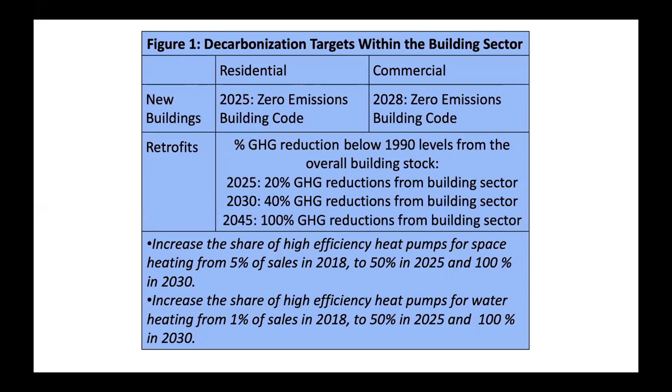Part of that roadmap is we adopted 5 major goals for the state in order to meet those numerical targets. They are about building awareness of all stakeholders engaged in building decarbonization, ensuring that customers receive a good value proposition and that builders and installers do as well, making sure that the supply chain is prepared for the scale of market transformation that's needed, getting barriers out of the way of that supply chain, and then aligning all of our policies to meet those goals.

So as a coalition we are working together on a whole stream of different activities to support these goals, and this webinar series is part of that effort. We think there's real benefit in bringing top speakers like Amber and top firms like E3 to the masses to talk about some of the best research, best products, and best work going on across the country, not only to our members but to folks not yet members of the Building Decarbonization Coalition. So this webinar series directly comes back to 2 of our goals: raising awareness and aligning policies to meet our goals of decarbonization by identifying what policies are needed and working together to get those policies implemented.

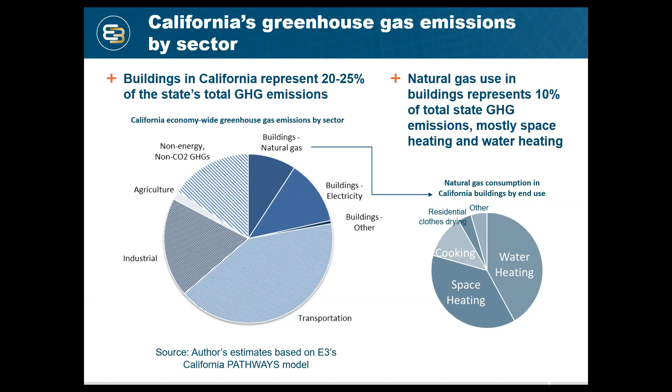California has set ambitious climate goals, including reducing emissions 40% by 2030. We have a 50% renewable goal by 2030, at least 5 million zero-emission vehicles by 2030, and now a 100% zero-carbon electricity goal by 2045. Those policies will contribute towards reducing the electricity sector emissions attributable to buildings.

But we don't currently have a lot of policies directly targeting reductions in natural gas use in buildings. We now have an executive order that is even more aggressive than the one we originally started analyzing here at E3, which is to get to carbon neutrality statewide by 2045.

From all of this work and from our analysis of how the state can meet these climate goals, we know that achieving those goals will require at least a 40% reduction in building sector emissions by 2030, and at least an 80% reduction by 2050, which is consistent with the roadmap goals that Panama outlined earlier.

So how do we reduce emissions from buildings? One of the key strategies is electrifying those buildings. What you're seeing here is an example of residential space heating.

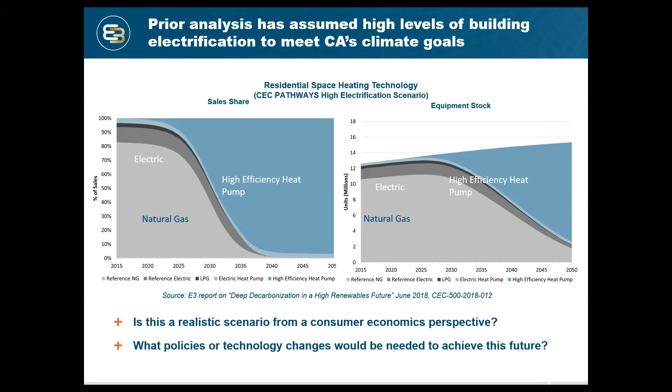Setting up on this study, we really wanted to evaluate whether there are economic barriers that would prevent this level of adoption, and what other policy or technology barriers or changes might need to be made to achieve a high electrification future. That was really the foundation for this work.

Transitioning now to talking about the study that we did, we looked at three phases of analysis. We started with a technology screening, really looking at what gas technologies and heat pump technologies, what electric end-use technologies are available in the market today. Frontier Energy and Point Energy Innovations helped us with that technology screening.

We honed in on a set of building simulations that we wanted to run for both gas, mixed fuel homes, and electric homes. That gave us results for hourly energy demand for both natural gas and electricity.

As I mentioned before, we also worked with AECOM to develop a really bottom-up, California-specific representation of equipment, installation, and capital costs. There we wanted to capture not just the cost of the equipment itself, but also the retrofit costs, labor costs, and contractor markup. We really wanted to get the complete representation of both new construction and retrofit costs.

We used the energy simulation results from Frontier Energy to calculate bill savings and did that analysis on an hourly basis. We combined the bill savings with the capital cost information to estimate life cycle costs. We then estimated greenhouse gas savings from building electrification and did a high-level screening looking at the grid impacts. The study is available at the link you see there at the bottom.

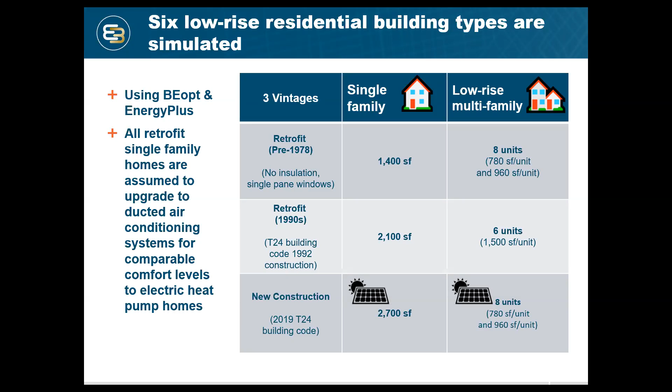Since heat pumps provide both space heating and space cooling, we wanted to compare that to a mixed fuel home with space heating and space cooling. We also think that's consistent with the trends the state is moving towards, seeing higher saturation of air conditioning in homes.

We evaluated gas and electric technologies for HVAC, water heating, cooking, and clothes drying. We looked at 3 different types of electric heat pumps for HVAC: package terminal heat pumps, mini splits, and ducted split heat pumps. We looked at heat pump water heaters, replacing gas storage water heaters in retrofit homes. And in the new construction home, the counterfactual was a gas tankless water heater.

We evaluated both electric resistance and induction electric stoves, as well as electric resistance and heat pump electric clothes dryers. We have details in the report about all of the efficiencies assumed for each of these technologies. But in general, what we were assuming for the heat pumps is a technology that exceeds the code minimum, but is still representative of commonly available technology.

So we did evaluate what we call best in class, or higher efficiency heat pump technologies, in our sensitivity analysis. But for the base case analysis, we wanted to take a representation of what might be most commonly adopted if someone was looking for a high efficiency product. So just to give a sense, if the code minimum for a heat pump is an HSPF of 8.2, for the mini split and ducted split heat pumps we were modeling an HSPF of 10 to 11, just to give some context. The gas furnace has an AFUE of 80 in this analysis.

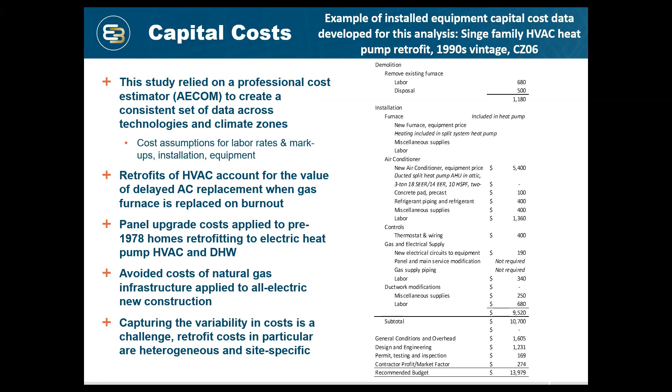Finally, I want to note that homes are heterogeneous, particularly retrofit homes, and it's a challenge to capture that diversity in this analysis. So what we're trying to estimate is the most likely or common example of cost in retrofit homes, but in any individual home you might have a different answer. Your mileage will vary, and there are a lot of ways costs could be higher or lower than what we've estimated here.

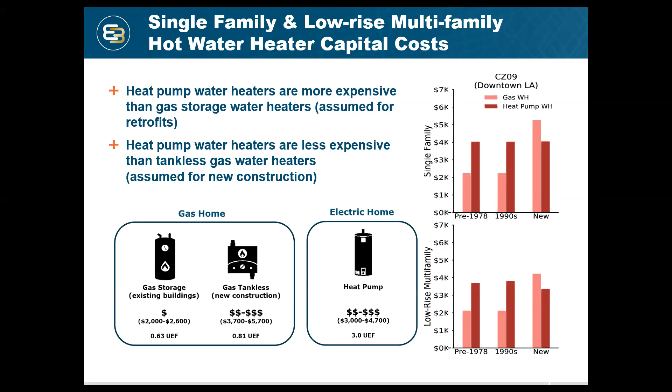In the new construction homes, where the counterfactual is a gas tankless water heater, we see capital cost savings. Some of that has to do with avoided gas piping infrastructure and simpler installation in new construction. That trend held for both single family as well as low-rise multifamily. There's more detail in the report about all the capital cost savings, but that gives you a flavor of it.

So now we'll move on to the bill savings analysis. I want to start by saying we did a pretty detailed look at consumer bills based on today's residential rate structures. We evaluated time of use rates based on currently available rates for PG&E, SMUD, and Southern California Edison. LADWP has a tiered rate, so we evaluated that in the LADWP service territories.

Overall, what we see is that having lower rates is more beneficial for electrification. In this analysis, SMUD and LADWP have the lowest electric rates, so we see more favorable economics, particularly for SMUD, because they have the combined benefit of having both lower rates as well as time of use rates, which are somewhat beneficial towards electrification.

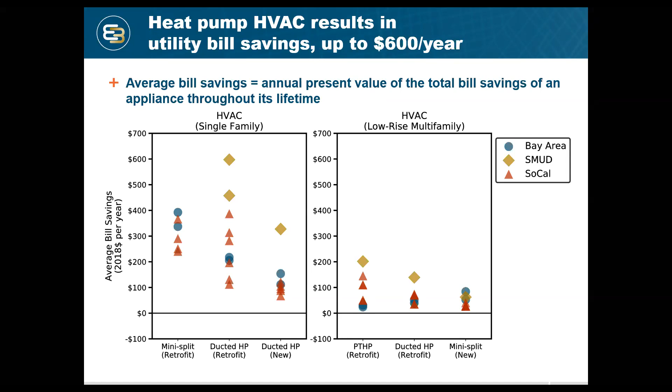Here we see some interesting interactions with the tiered rates, leading to some of the variability between single family and low-rise multifamily homes.

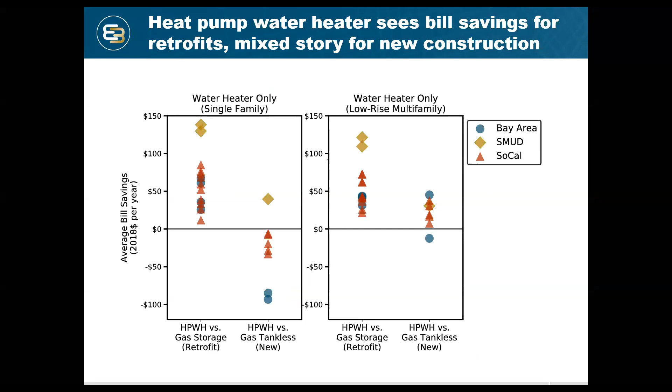In the all-electric new construction, it's a little bit more of a mixed story, but we still see over half of the homes that we evaluated seeing bill savings. The gold wedge here has a bill increase of less than $100 per year, so still pretty favorable. This was actually pretty surprising to us. We weren't expecting the bill savings to look as good as they did, but this is really in part because we're evaluating some of the more efficient HVAC technologies, and a lot of the previous studies that we had been looking at were really looking at a building code, kind of code compliant set of heat pump efficiencies.

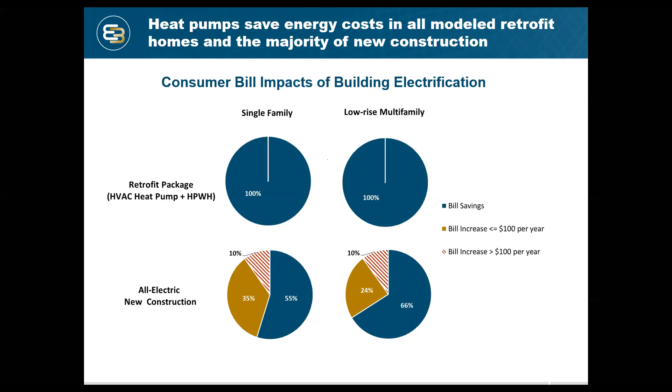Now moving on to the life cycle savings, and here we're combining the capital cost assumptions that we presented previously with the bill savings to get a life cycle cost of ownership over the lifetime of the equipment or over the lifetime of the building. This table shows the equipment lifetimes that we used for this analysis. We take a net present value of the bill savings and bring it back to today to calculate life cycle costs using a 3.35% discount rate.

I won't go through all of the details of the life cycle costs, but those are in the report if you're interested. Again, just jumping to the summary where we take the results for all of the climate zones and all of the simulations that we looked at, we see life cycle savings in 87% of the single family homes that we evaluated. We also see quite positive life cycle savings in all electric new construction.

The 24% there that you see where there is a life cycle cost increase, that is for the set of homes that we evaluated in San Francisco where the counterfactual does not have air conditioning. So this really highlights one of the key findings of the study, which is that electrification, particularly of HVAC, is positive when you also have some need for cooling in the home. You can take advantage of the fact that a heat pump provides both space heating as well as space cooling.

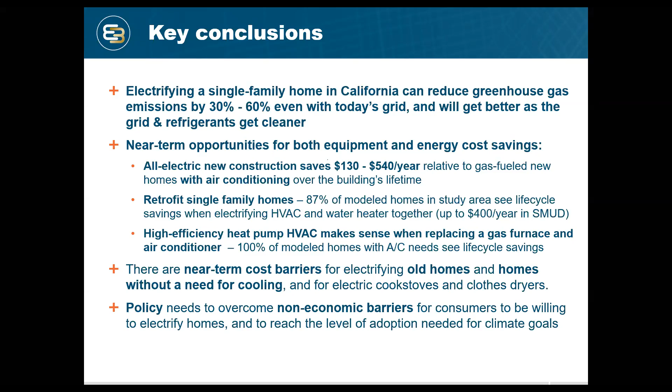So there's plenty of need for policy to overcome some of the non-economic barriers. What we were really surprised about, I think, going into this study, was that the economics are a lot more positive than we expected, but the adoption rates for heat pumps remains relatively low. And so what that tells us is that there's a lot of other barriers that need to be overcome in California. So that gets us to our recommendations, which is how do we overcome some of those barriers?

One of those is incentivizing all electric new construction and updating the building code, which we think can help further the market transformation that's needed to get consumers more experience with these technologies. We also see a role for incentivizing high efficiency heat pumps in areas with air conditioning. Because the economics are already positive, the incentive there is really around overcoming any other kind of consumer barriers to adoption.

We see an important role for efficient price signals in electric and natural gas rates. And just from this analysis, we saw how important having appropriate time of use rates looked for the consumer economics.

Having relatively low electric rates obviously helps the economics of electrification. And on the other side, having a higher carbon price or other policies that reduce the carbon intensity of natural gas could also help reduce emissions in buildings, or at least put electrification on more equal footing with natural gas use in buildings.

We see a role for a market transformation initiative around building electrification, which gets to some of the roadmap goals Panama outlined at the outset of this call - there's not a lot of consumer education around these technologies. Even though the consumer economics look relatively good, if people aren't familiar with the technologies, they're not top of mind when doing a remodel, and they're not going to happen.

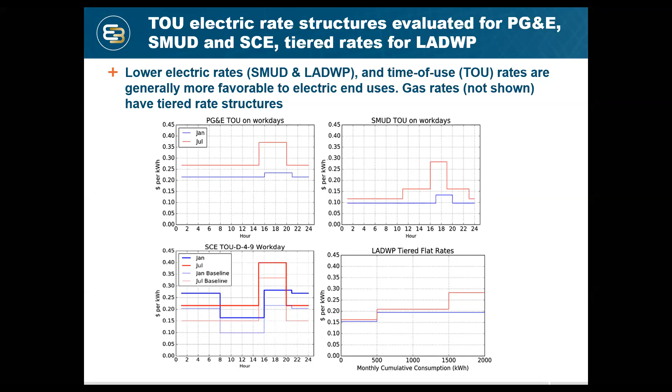Great, thank you. I'm just going to keep running through these, see as many as we can get in here. On the grid impact slide that you put up, did you look at the impact of a changing climate on cooling demand?

No, in this analysis we didn't. In our previous work for the CEC, we did a 2018 publication where we did estimate the ways in which the number of cooling degree days would increase and the number of heating degree days would decrease. But we weren't able to incorporate that into this analysis.

So if anything, we would expect to see, due to climate change, more air conditioning loads and less heating demand. But I want to qualify that this analysis is also assuming kind of average weather, so this is maybe like a 1-in-2 weather year. You may have more weather extremes as well that could lead to higher peak demands in winter or summer due to just climate variability.

Great, thank you. Here's a question, more of a statement. It's about when you mentioned refrigerants and fugitive natural gas. The questioner would have liked to have a mention that those greenhouse gases are orders of magnitude more effective than CO2 at trapping heat. Did you take that into any of your analysis? Did that affect any of your analysis in any way?

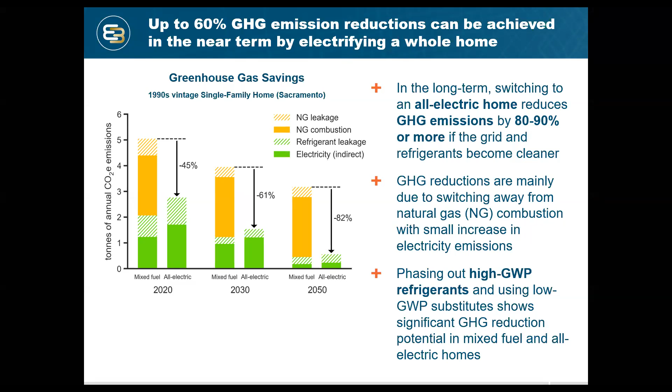Okay, great. And I think you somewhat addressed this in your recommendations, but have you explored new lower voltage and lower current heat pump water heaters to reduce panel and wiring upgrade costs in any of your analysis?

No, we didn't look at that here, but we call that out as an important way to reduce some of the retrofit costs for building electrification. And I think, as I mentioned, there's a lot of ongoing work there, and so some exciting opportunities that could lower some of these adoption barriers.

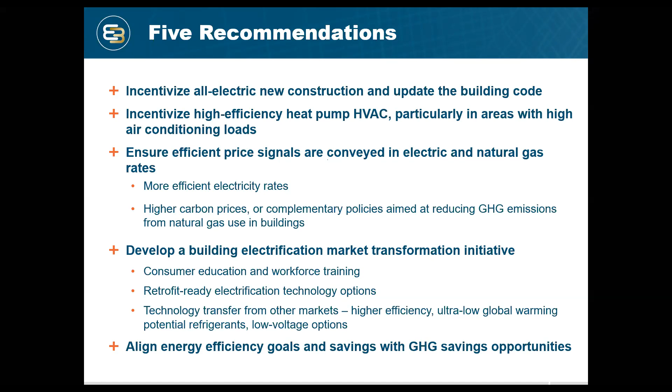Great, next question is, how can any of the registrants access the cost assumptions on heat pumps, heating, and water heating compared to gas that you used in your analysis? Yeah, so we have the figures in the report, but I guess if a registrant wanted the detailed spreadsheets, we would have to get permission from the funders to share those. Okay, but there are some figures in the report. Yeah, we have detailed figures, kind of like the ones that we showed here, for all of the technologies that we evaluated.

Great. And we have that for both single family and low-rise multifamily.

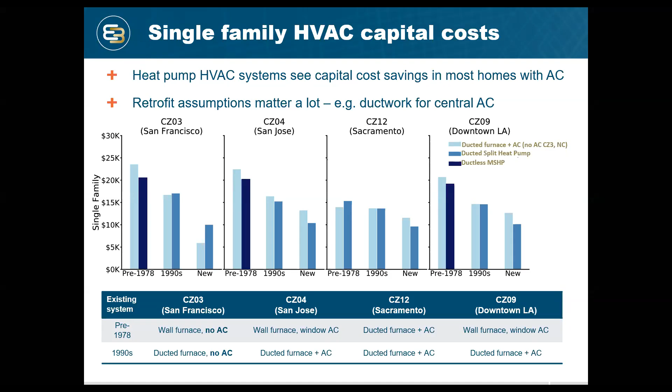For multifamily building examples, did you look at central water heating systems as well as individual water heaters? No, we didn't - that gets to the question around hydronic systems as well. For low-rise multifamily homes, I'll revisit what we looked at: package terminal heat pumps for some of the low-rise multifamily, and then mini split heat pumps and ducted split heat pump systems.

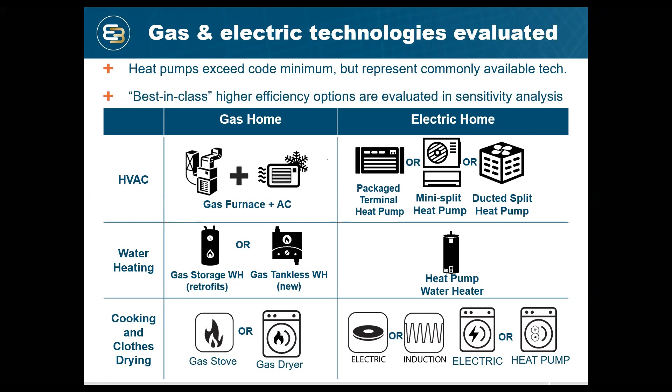Okay, thank you. You mentioned there was some potential negative cost impacts for cooking and for clothes drying. What's the scale of that cost impact? Are we talking about significant amounts of money or small amounts of money?

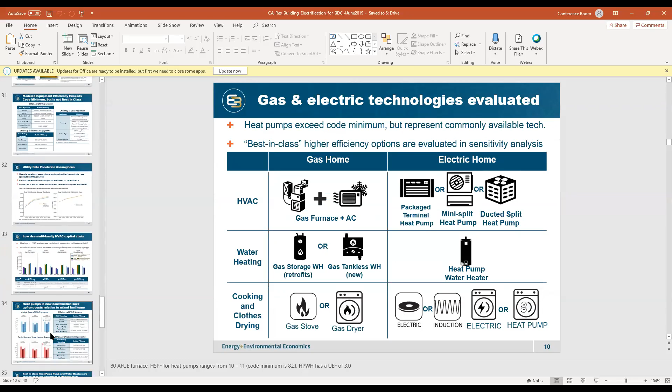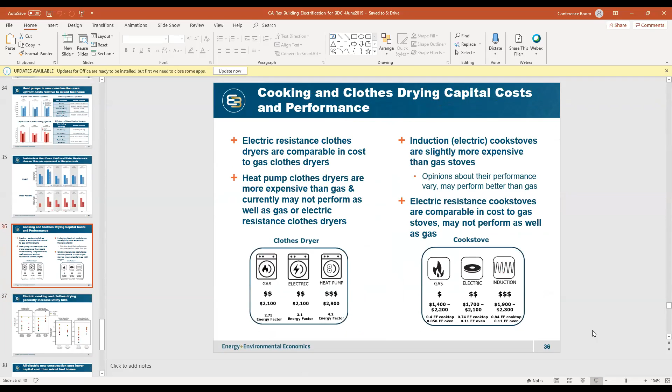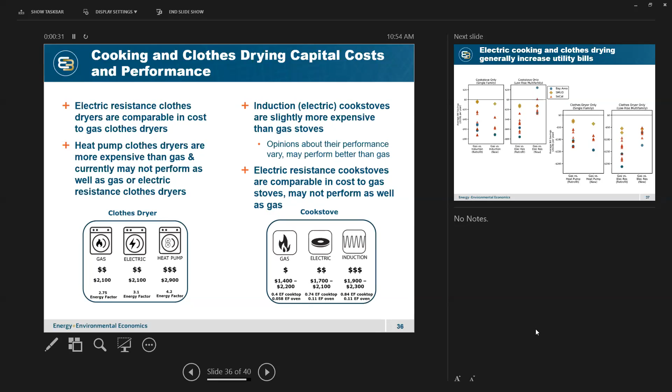Yeah, I actually have a slide on that in the appendix that I can jump to. Here we go. I'll start with the capital costs. The capital costs of an electric resistance and a gas dryer are about equivalent. A heat pump clothes dryer is about $800 more expensive. And then on the cook stoves, we see there's quite a range depending on the quality, so from a capital cost perspective, there's not a huge difference between gas and electric.

So overall, we see the market still driving more towards electric resistance clothes drying, at least in the near term. So, not huge costs, but that's what they look like.

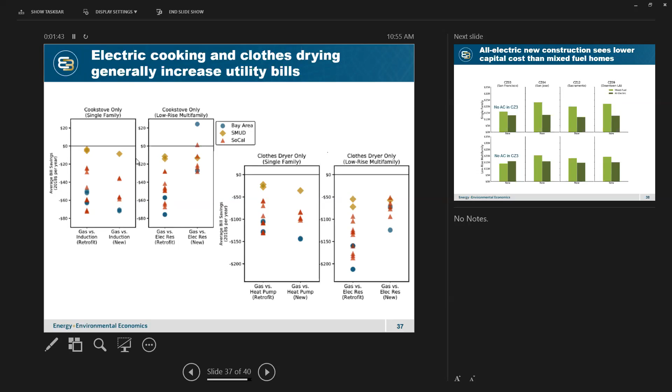Okay, great. And then the last question we have is, what impact would energy efficiency retrofits or natural stock turnover have on that 1990s vintage home that might deviate from the 1990 Title 24 specs?

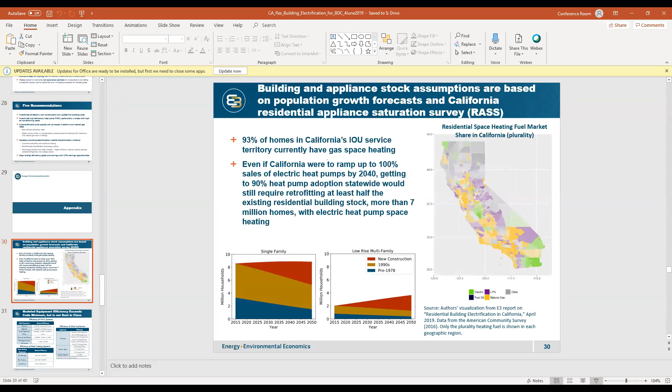Yeah, maybe I can answer that question by showing this figure. This figure on the bottom represents our estimate of the stock of buildings for single family and low-rise multifamily by vintage. The 1990s vintage homes are assumed to shrink over time, certainly as a share of the building stock, but also some portion of those homes will undergo deep retrofits and be brought up to code and become more efficient over time. But they are still expected to represent a very large share of that class of buildings, built after 1978 and up through essentially today - still representing a large share of the total building stock over time. So having retrofit options that work for those homes will be important.

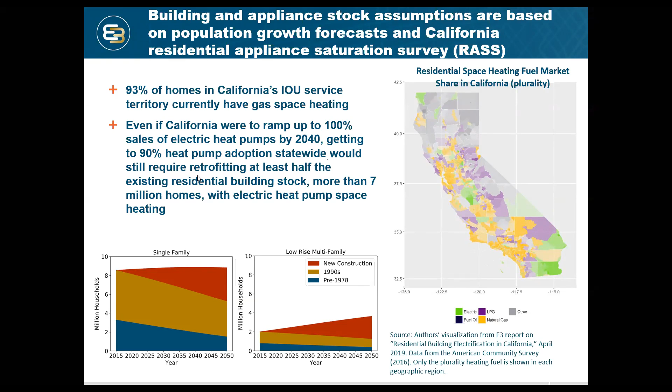No, I just want to say thank you for your interest and your attention. And there's a lot more detail in the report if you want to dig into the details.